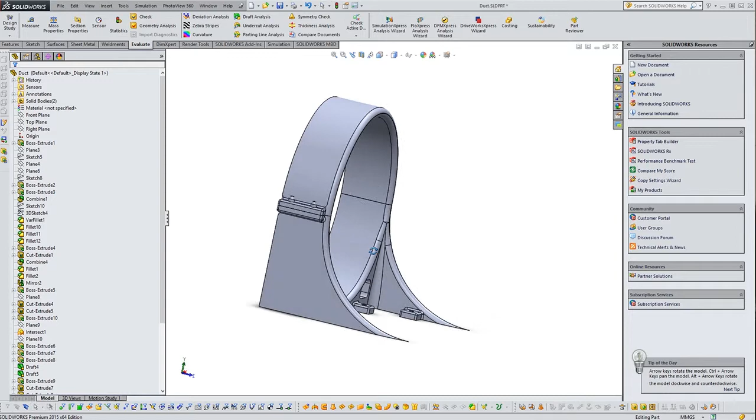Well, as mentioned previously, the duct, and this is it, is probably too heavy. In fact, definitely too heavy. This at the moment is just a solid material of no real description.

And I believe if we have a look at the mass properties, yeah, if you don't apply any material to a part, it defaults to 0.001 grams per cubic millimeter. And PLA, plain old PLA, which I guess I might make this out of, is 0.00126. So not very far away as it happens.

And so we can see that the weight of this at the moment is 849 grams. So it actually weighs way too much. In my original calculations, I allowed 200 grams for this duct.

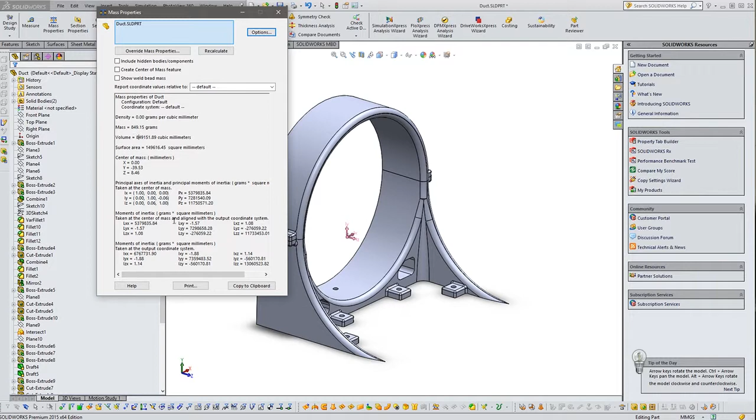So, yeah, I have created previously a material, and let's have a look at it. Down here, this PLA 40% infill with 1mm perimeters. So basically, it's like a nominal thing. So printing with PLA, we take the normal density of PLA, which is 1260 kilograms per meter cubed.

Then what I did is I sort of guesstimated really by simulating a block, a 10mm cube block, which I did 1mm solid at the bottom, 1mm solid at the top, and 1mm solid on the sides, and then the middle of it was 40% solid and 60% hollow.

So that should sort of replicate the overall density of that cube if you printed it with 40% infill and probably, what, 3-ish perimeters on the print. Very long story short, it gives me a rough approximation that printing in that way gives us about 870 kilograms per cubic meter.

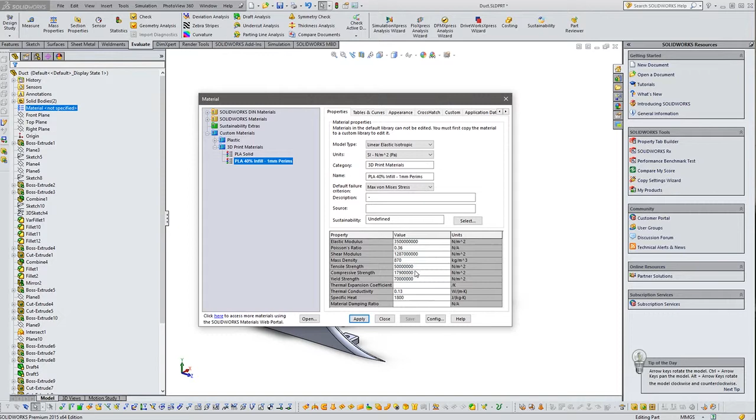So if I apply that to this part, close it, and then have a little look again at the mass properties, we can see it's gone down a little bit. It's gone down to 738 grams, but it's still basically, well, more than 3 times too heavy.

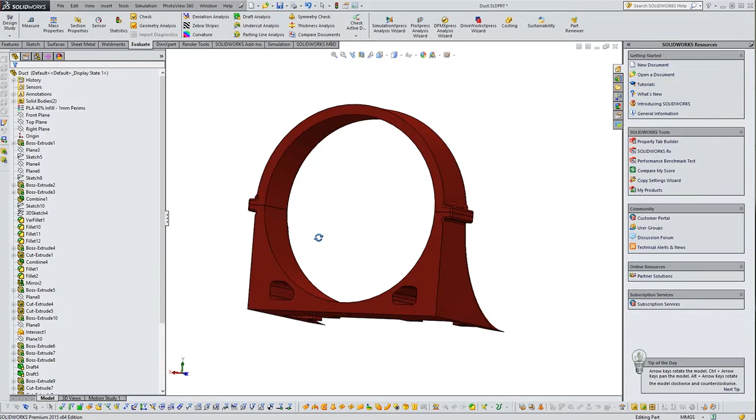So I now need to remove quite a lot of this material, and a lot of it's not needed really, because my only important part of this is a smooth surface on the inside here. The rest of it just needs to hold itself together. So I'm going to go and set about removing as much material as possible.

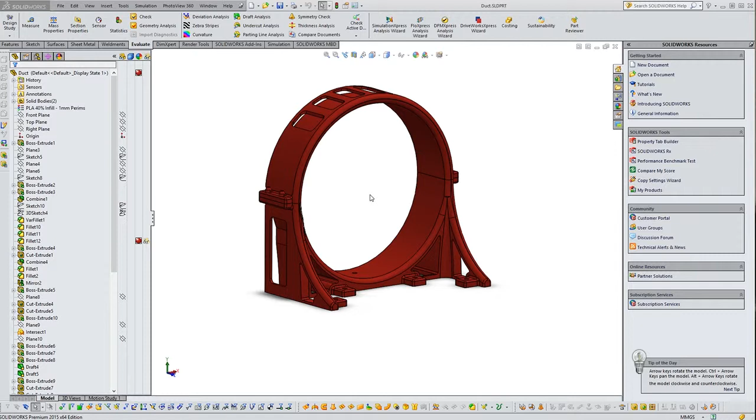Well, there we go. I've taken the lightening of this as far as I dare. And even that's pretty sketchy really. So we've got some major cutouts going on here. Basically everywhere that I conceivably could remove material, I have removed material, to the point where I don't know if it's going to have enough strength in it, but hopefully.

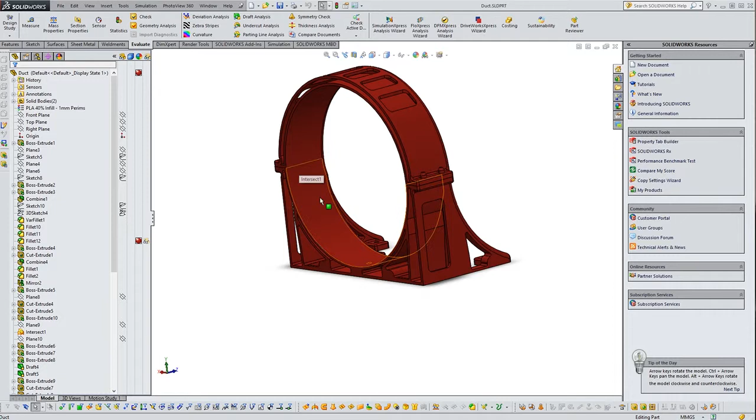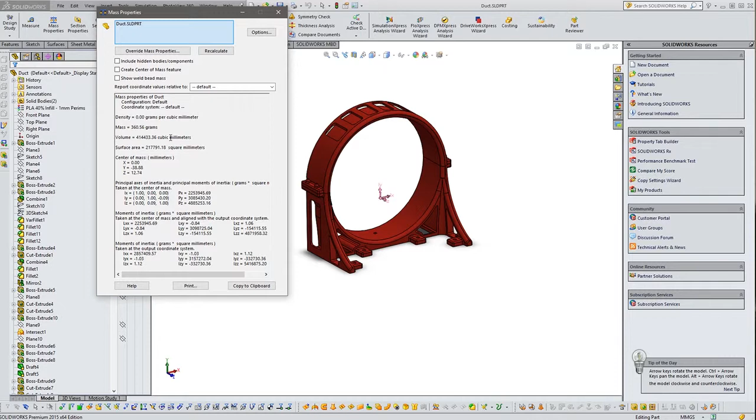So with that, the weight has reduced obviously. It is now down to 360 odd grams. So we're down from 849, or 700 and something as it was with the PLA. So I've shaved off a good 400 grams and really don't think that I can reduce it anymore. So we're about 160 grams over on that one. Which is scary because I guess the engine support structures are going to be over as well.

But once we get all these bits shaved down as much as possible and we've got an accurate idea of the weight, I'll probably have to revisit the volume of the hull slightly. The good news is you don't really need to enlarge the hull much in a specific dimension to get a whole load of extra volume, which will give us a whole load of extra buoyancy and will handle the weight.

It's probably going to be a bit of a pain, to be honest, changing a hull, because there are now so many things dependent on it that there'll be a lot of things to update, I expect. But well, there you go. That was going to kind of happen, I expect.

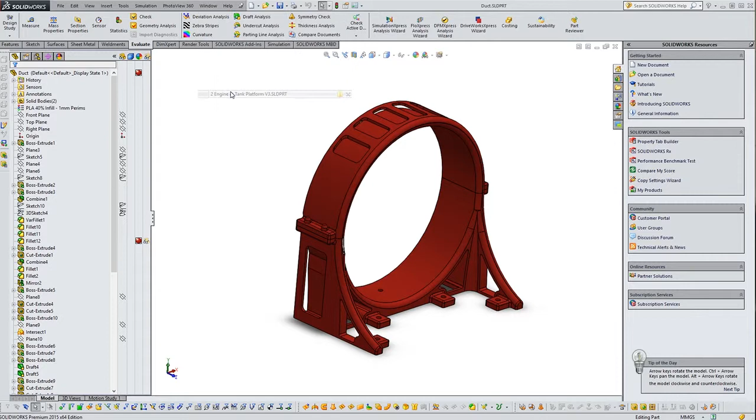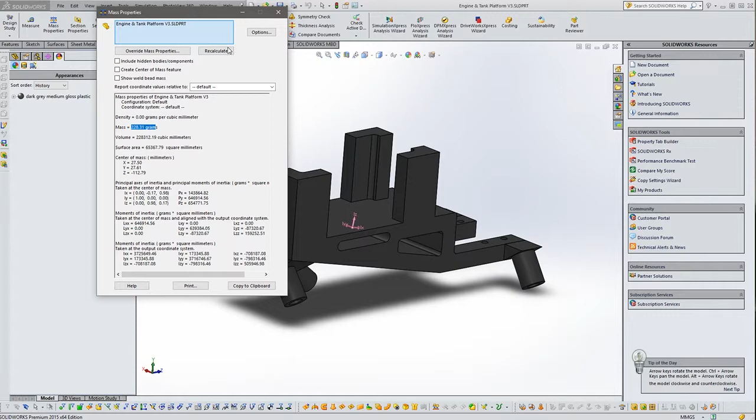So what I'll do now, in between the end of this video and the next time that we meet, is I will do a weight saving exercise on the engine support, which is currently weighing in at 228 grams. So that's not bad actually. That is with a standard material weight, so probably looking at maybe slightly under 200 grams with my 40% infill PLA material. And I reckon I can get rid of a good 40% of that,

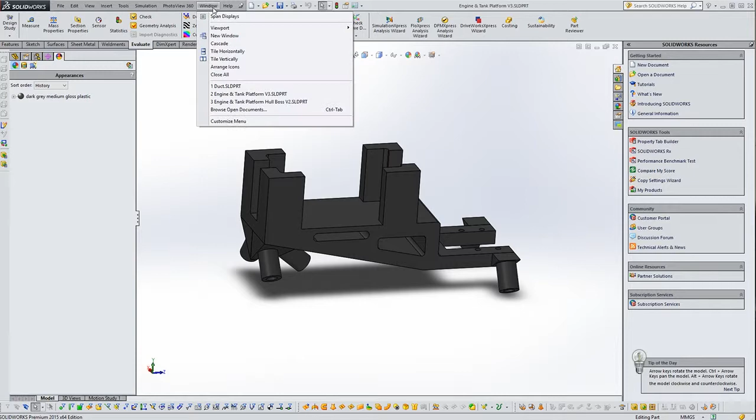which is going to get that down to about 100 odd grams, which still leaves us over because I only allowed 100 grams for the engine mount, which does include this bit too, which is currently weighing in at 191 grams. I can shave a lot of weight off of this, but even after doing that, the best I can hope for really is probably around 250 grams for both of those, which leaves us 100 grams over there as well. So we've got about 200 and, well, let's call it 300. So we're talking about half a kilo all in all extra weight, which I didn't account for, which is significant.

Anyway, let's do the weight saving exercises and see what the whole thing weighs.